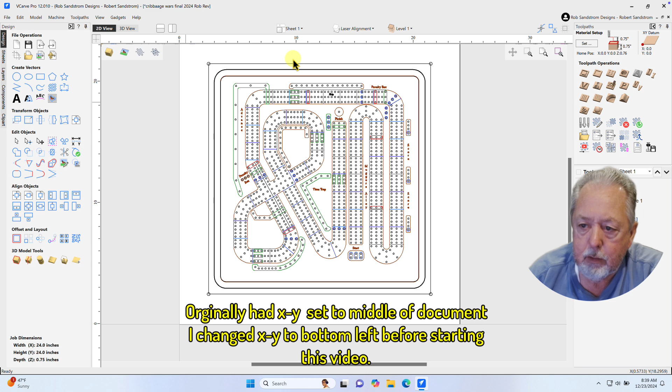So I'm going to focus on one thing in this video, and that is being able to accurately move your projects. You'll notice that in this project, I'm making a cribbage board. I'll have a video on that at some other time, but not now. I've done the whole thing, got everything set up with all my toolpaths, and I did that all in the middle, which I have a tendency to do so I can keep parameters, use the mirror functions and other functions to make everything even.

But now that I've got this whole thing designed, I want to make it so that it's no longer centered. I've already taken care of the first part of that, which is to go over here, and instead of making it so that it's in the center, I changed it to the left and I hit OK. When it asked if I wanted to redo my toolpaths, I said no, because I knew I was going to go even further.

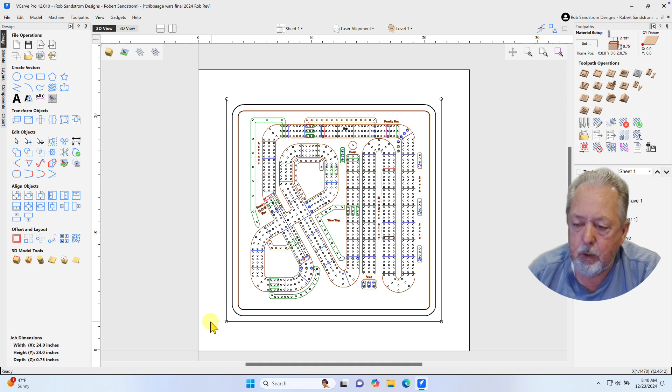The reality is I want my cribbage board to be 1 inch in and 1 inch up on the material based on where I've put all of the hold downs. So the first thing I'm going to do is hit Control A, and that'll select everything. Then I'm going to hit G for group so that I don't take a chance on moving around. And there's two different ways I can move this thing to get it exactly where I want it, 1 inch in and 1 inch up.

Way number one is I come over here, and I find it easiest just to go on the toolbars here and go 1 inch. And then I come down over here and go 1 inch. So now I know this is exactly 1 inch and 1 inch. If I try to move it straight over from here, it won't work well, because that's actually the resize part. You see that X? You don't want that.

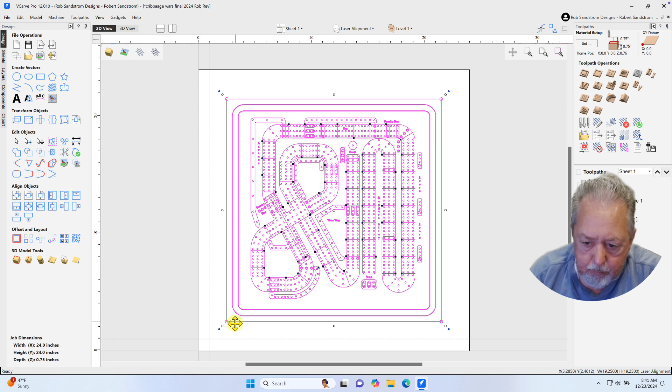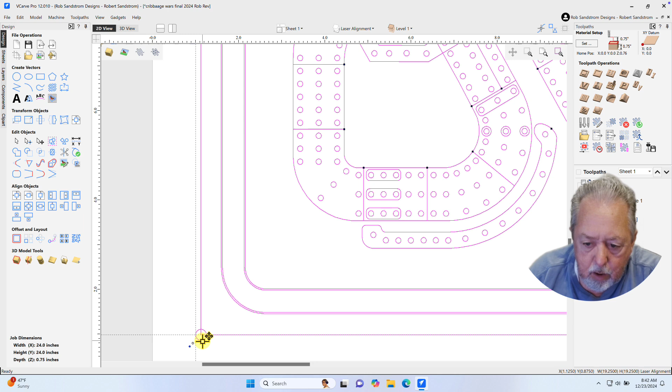So I'm going to come over here and bring it down to 1, and then bring it over here to 1. That will get me exactly 1 inch in and 1 inch up, but it's based on this corner spot right here. Let me show you a different way. I could move it so that it's based on this. I just grab this over here and move it like that. Now I'm 1 inch there and 1 inch up.

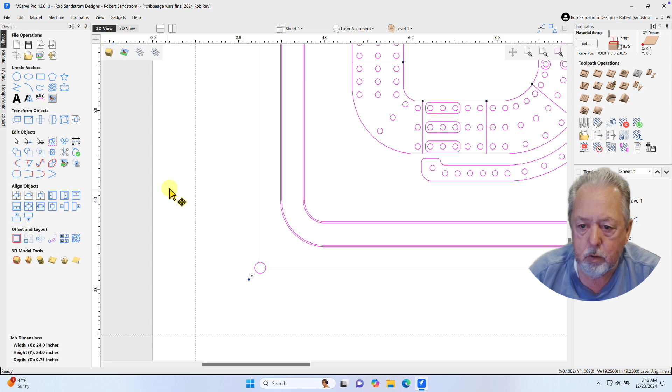So depending on what I'm trying to accomplish, do I want this circle in the 1 inch and 1 inch, or do I want this square? That's one way to do it. Let me show you another way. Let me undo that by hitting Command Z on my Mac, or Control Z if you are using a Windows computer. Let me take away the guides, click off.

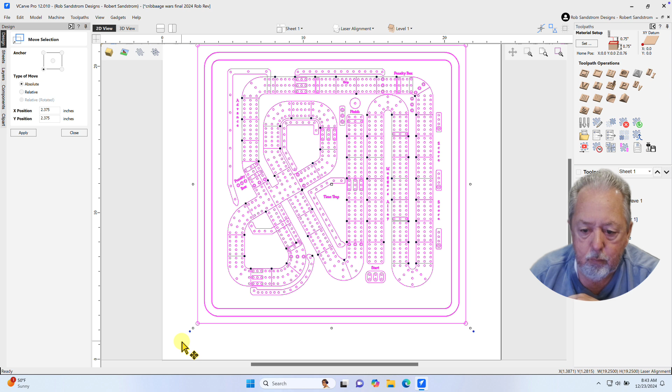Now, instead of moving everything around manually, I'm going to use the Move Selected Objects tool. I'm going to select that, and then say I want to move absolute. When I say I want to move absolute, I pick the anchor point. I can put it in center or the bottom left, and because I want this in the bottom left, 1 inch and 1 inch, I'm going to make sure I have that selected.

Hit absolute. I'm going to come over to 1 here and 1 here. Hit apply. And now I'm exactly in the same location at 1 inch up and 1 inch to the right, and I'm ready to go. It's that straightforward. You can put this anywhere you want on the grid. The key point when you use this Move Selection tool is where your anchor point is if you've got absolute.

Let me show you what you would have seen if I had messed that up. Let's say I'd left that anchor point there, and then I hit 1 and 1, hit apply, you'll see it's way off. Let's undo that. So you want to make sure you've got the right anchor point. If I wanted to anchor it up in the right, I would select that. If I wanted the anchor point on the top, I'd come up here. So just make sure you've got the right anchor point.

The other way you can use this tool is relative. Relative means based on where everything is. If I wanted this 1 inch to the right, I could do 1 inch, hit apply, and you can see the whole thing moves 1 inch relative to where it was before. If I hit minus 1 inch, it'll move back. If I hit 5 inches, hit apply, it goes 5 inches in.

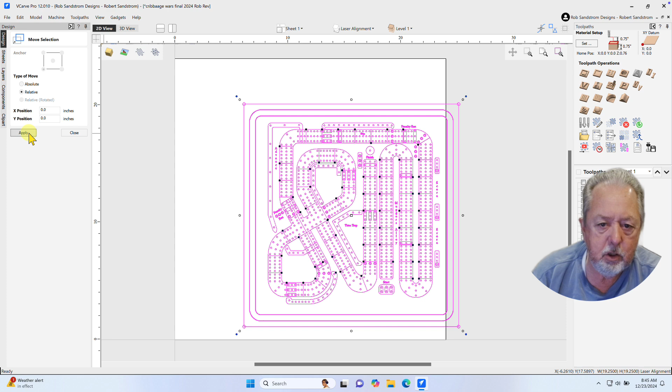So I'm going to get out of that and Command Z. We're back at 1 inch and 1 inch. I'm going to hit close, and now we've got it located exactly where we want. That's all there is to using the move tool.